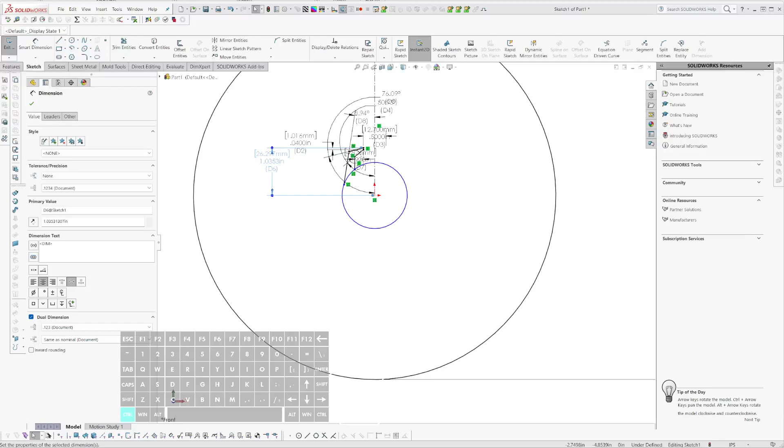Alright, so now I need a handle. I'm going to make this construction. This is kind of useless. Actually, I'm going to delete this because the handle's going to be longer than the rest of it. So I'm going to delete that.

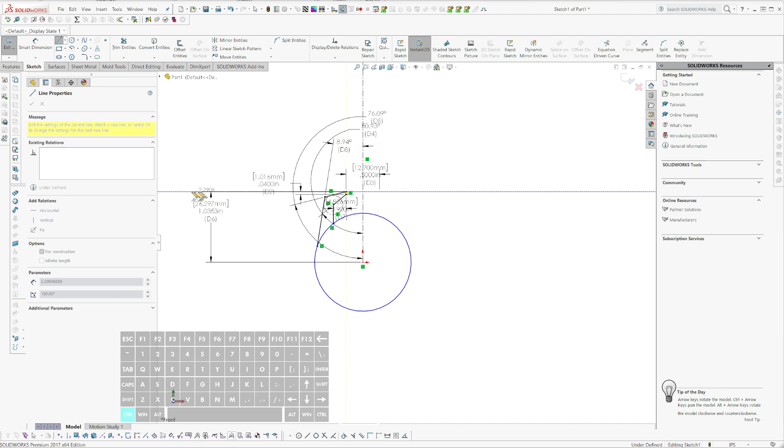Instead, I'm just going to create a line here and offset it. What did I say, 7 inches, I think? 8 inches? Let's say 8.

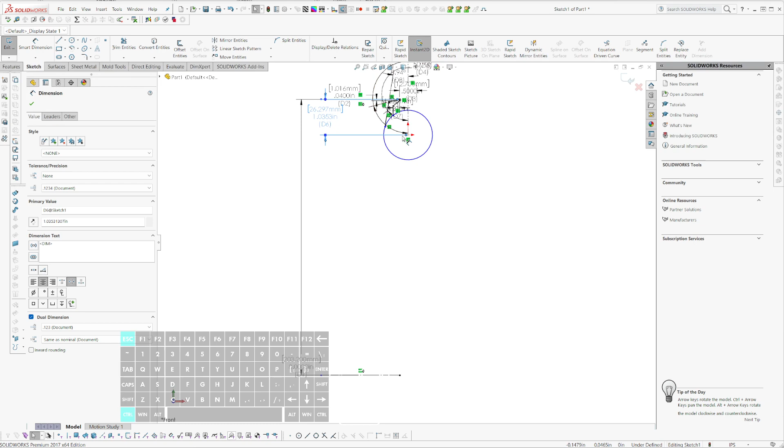Alright, so that's just going to be our approximate handle length construction. And because this is like an inch and this is 7 inches from there to here, this needs to move like not quite a quarter of an inch, but let's say a quarter inch. So 7 times a quarter inch, that would be like almost 2 inches. And is that right?

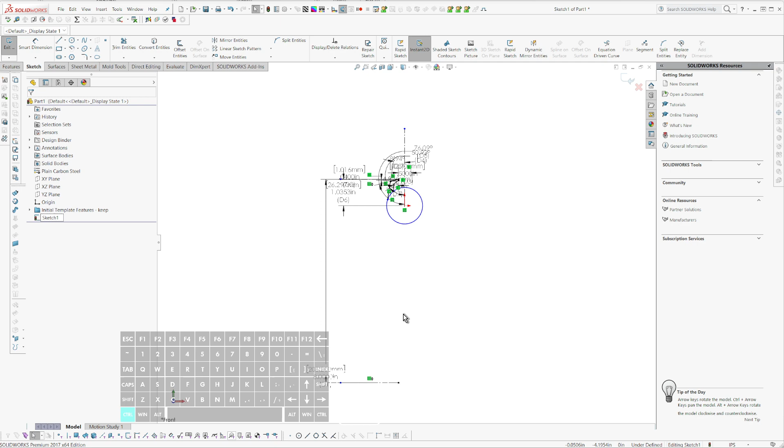Yeah, inch and 3/4. And so I'm going to do this, and I'm going to put a dimension here of 2 inches. This seems, yeah, I'm gonna go with it.

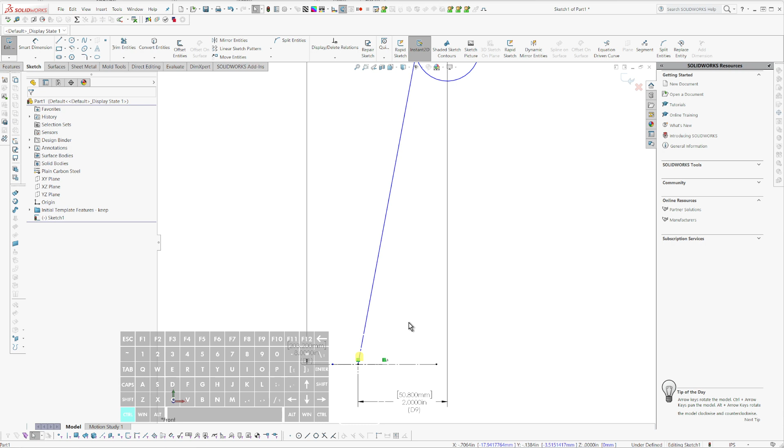Alright, just to lay out the basics of it, and then that would need to go like so. And again, I want this to taper. Let's do this.

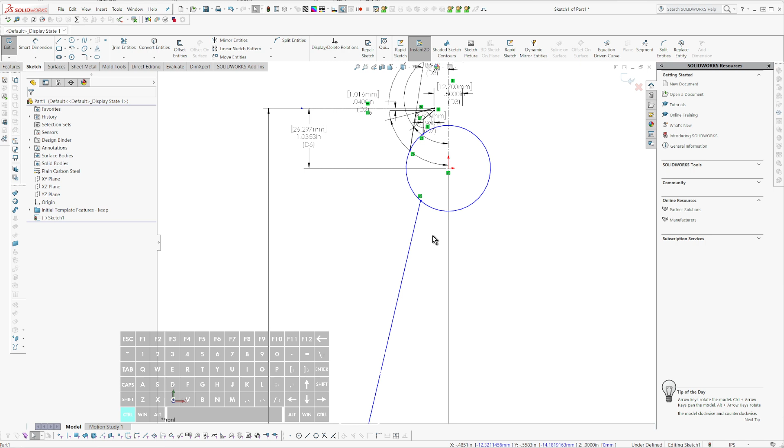Why is that not moving? Ah, I want to, we'll call that good for now, but I want this to sort of taper out.

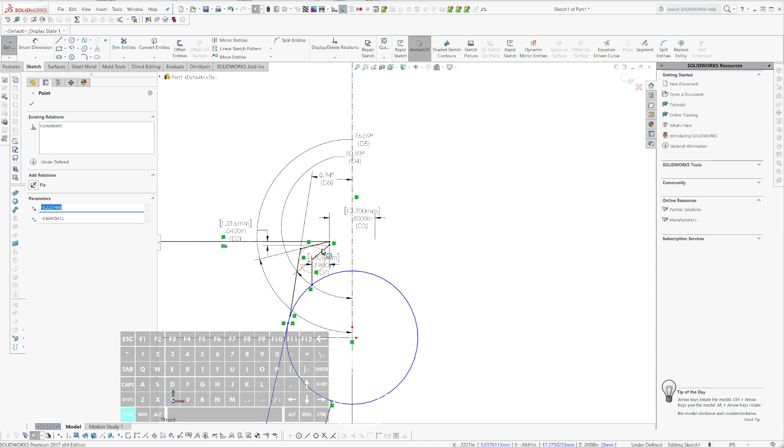Let's say like that. And I just realized that when I pull on this, it's going to pull those apart. So I need it to reverse somehow. So how can I get this to reverse?

I'll probably make the handle a little more ergonomic also. You know, something like that's probably a little exaggerated.

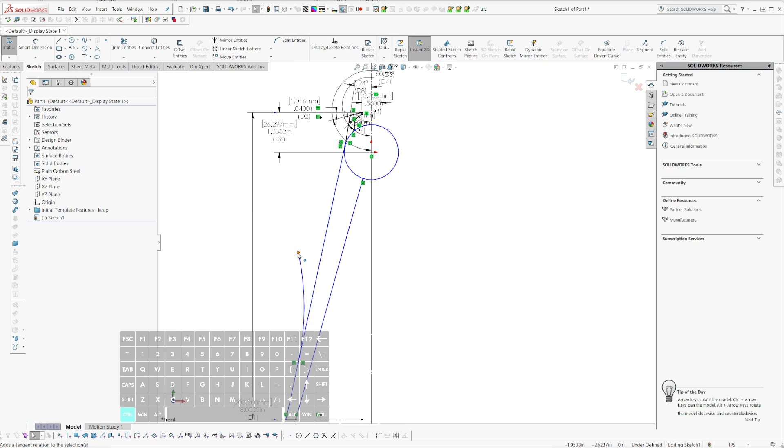Let's make this tangent, and like so. I can just trim this guy. Alright, so now I have a little bit more handle shape. So I need these to go the opposite direction.

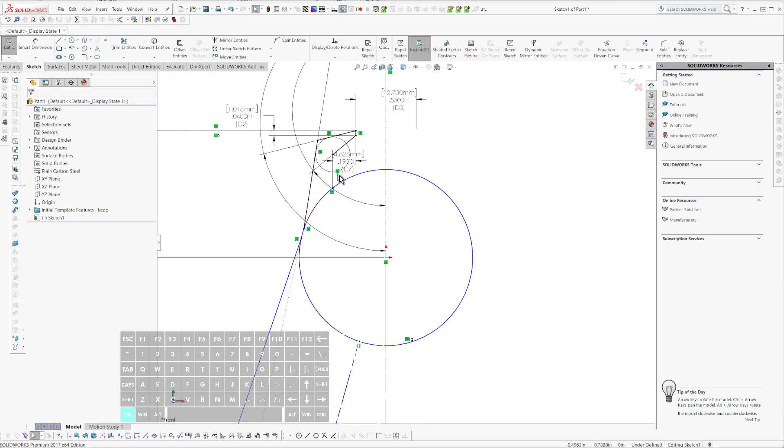So I made some snap ring pliers a couple of years or so ago for my Can-Am. Funny story, I ordered a special size snap ring pliers from Amazon to fit my ball joint snap rings, and the package, the tool was the wrong size, the package was mislabeled, the ad didn't even match the package. It was a fiasco, and so I just ended up designing and making my own 3D printed snap ring pliers.

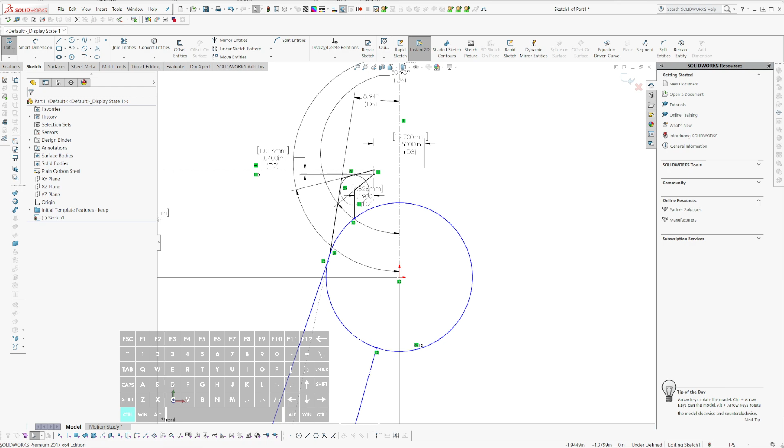No, actually that doesn't work because these, as I say, the same thing. These go the wrong way. These, if I squeeze the handle together, the pins come apart. So this was obviously for an external snap ring.

Yeah, I guess it was. For a second I was thinking internal, but yeah, the ball joints on that machine are external snap rings. They retain the ball joints, which still almost feels backwards, but no.

Plus this worked, so it had to be that way. Anyway, so I want to do similar, but I need the action to be the other way. So this handle works this side instead of this handle works this side.

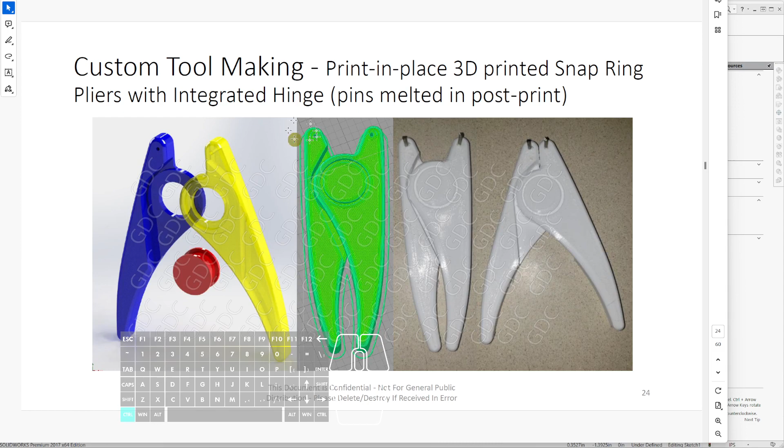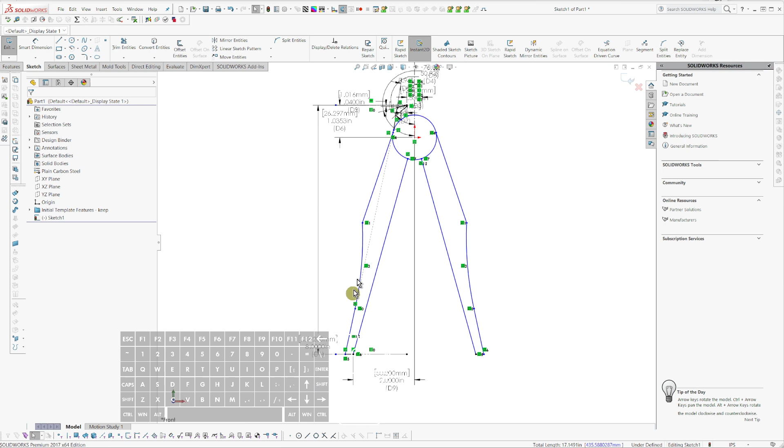Alright, so now this is going to operate in reverse, so I need to mirror these guys, this here, mirror that to there, and I'll make these reference geometry. I'm sorry, construction geometry.

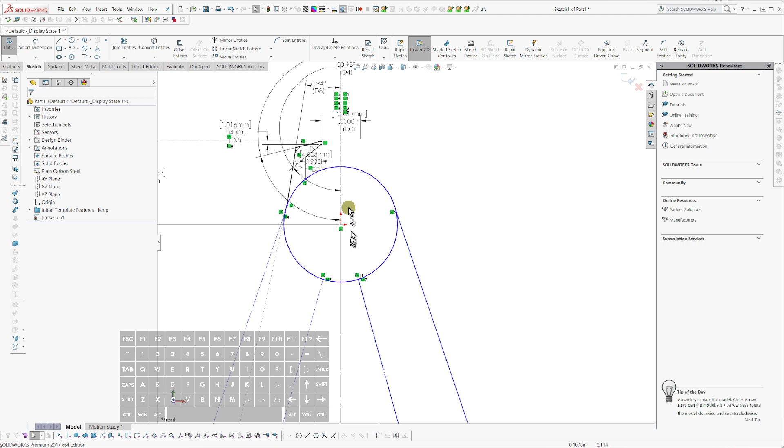Alright, and so, so this should be fine. This distance, this is closer to the pivot than this is, so this being this close should not be problematic. I think I can even make it closer. It's probably good to have the hinge pretty big, just so it's strong enough.

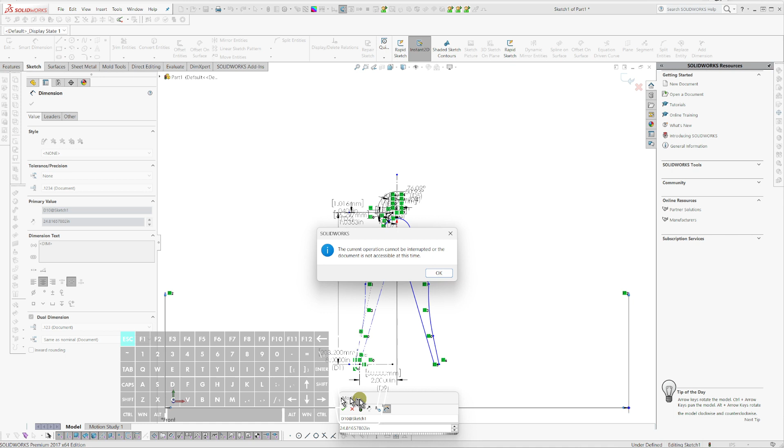And how far apart is this? Oh. And if I go leaders and if I go leaders minimum and minimum, so that is 3 inches apart. Yeah, I should be able to grab that pretty comfortably.

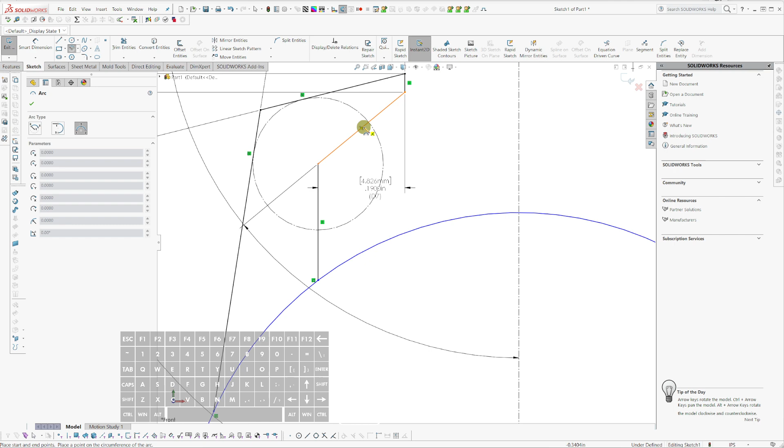Alright, and so I can basically, how do I do this? Oh, I made that intentionally that far apart. Let's just do this. Let's do something like that. And trim that guy.

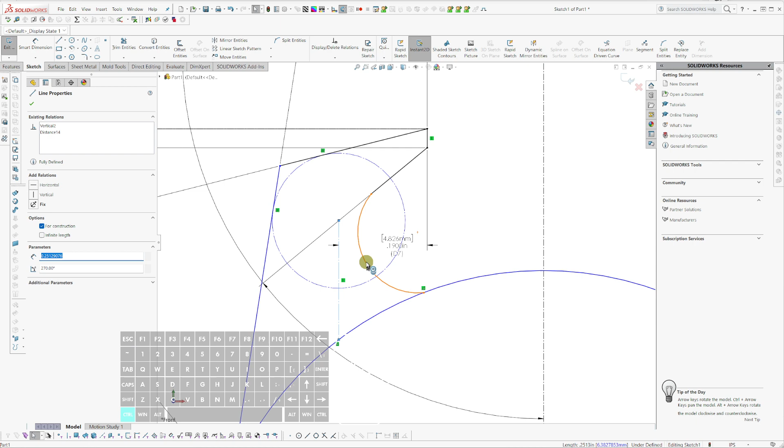Let's instead do this. Instead of that, I'm going to make this construction. I will trim this one. And then I'll make this one tangent. These two, right? And so that should make that stronger. Should make these tangent also.

And I don't know why it didn't give me the tangent option. I kind of do because I selected the dimension also, but it didn't. The dimension didn't show in the selection box. But anyway, whatever. Do I want this tangent? Okay, that seems happy enough. And let's make this guy tangent.

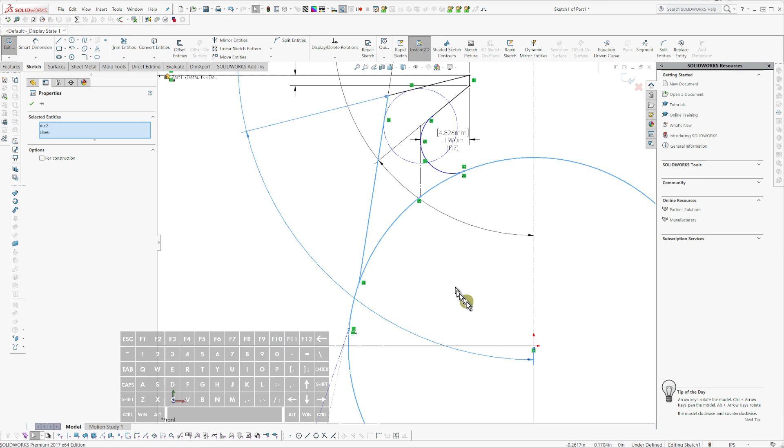Why are these not giving me the tangent option when I'm selecting the arc? Oh, because I selected the dimensions. Well, okay, and still not. Why is it selecting that? No, deselect. Okay, fight me then. You know what? Fine. I'm not even going to make it tangent because I don't need it to be tangent.

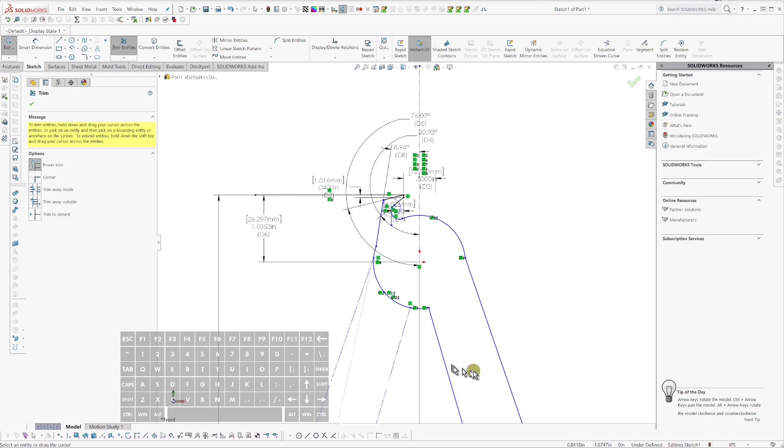Alright, so I'm going to trim this. I'm going to trim this. I'm going to trim this. And this is my basic shape. And so I will extrude. X for extrude. And it's giving me thin. So somewhere I either have an extra line or non-contiguous lines.

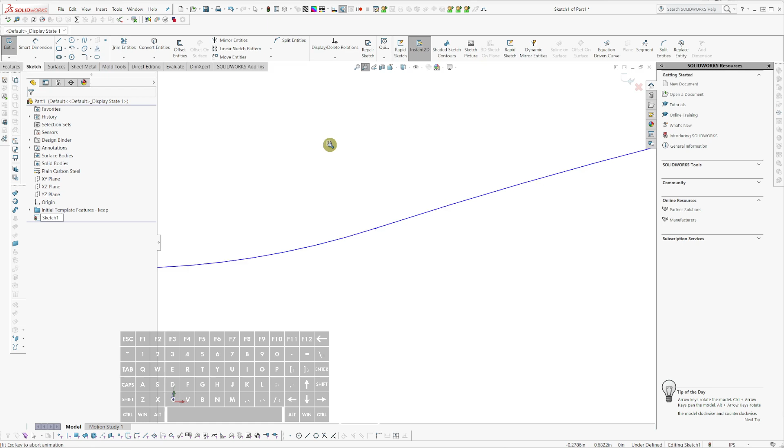A little trick to figure that out. Maybe I'll make a short out of this little trick. If you don't have a, if it's giving you a thin feature, here's how you find out where the missing, where the problem is. Show, hide, relations, Shift R. Okay.